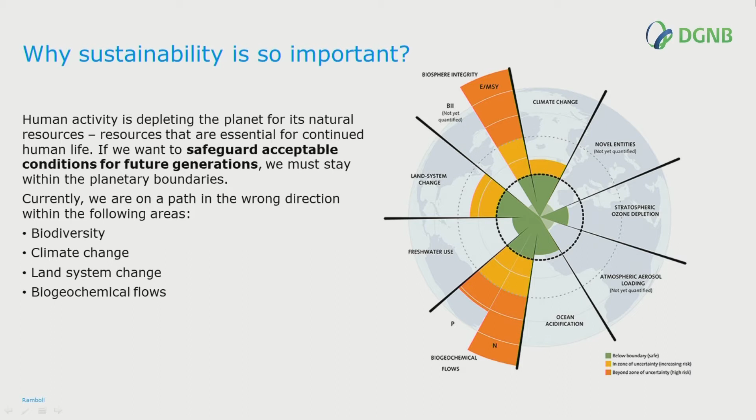So that is, first of all, within biodiversity. There's so much loss of biodiversity every year that it is dangerous for the planet. We don't have many years left if we don't do something.

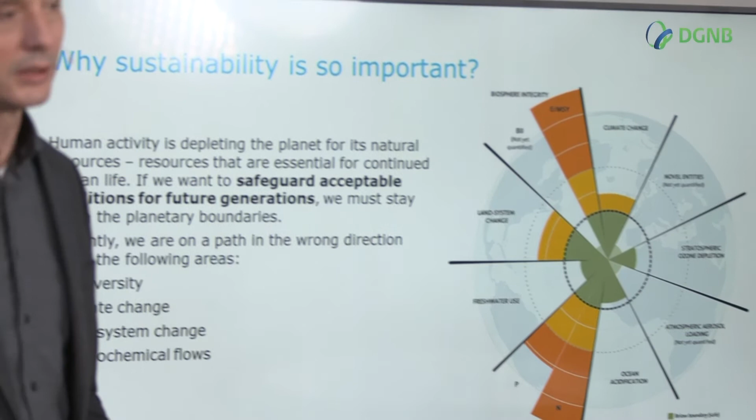It's also climate change, but a little less serious, surprisingly, because that tends to be all we talk about. And then it's about land system change, and finally about biogeochemical flows, where I think at least the last one is not so relevant for the building sector, but the three most critical ones are very relevant for the building sector.

So we really have to look at those planetary boundaries and get them back within the limits, within the green zone. Otherwise, we are going in the wrong direction.

You can also say this in a different way. You can say that unless we do something, then already in 2050 we will use the biocapacity of 3 Earths, and so you can imagine how fast it will go before we have used up all resources.

And when people try to understand what we mean by this, well, what we mean is if you have money in the bank, you spend all the money, then you start borrowing money, but you cannot continue borrowing money. At some point, you have to pay that money back. Otherwise, you go bankrupt. So humankind, you could say, is about to go bankrupt for the biocapacity of what we have borrowed from Earth. We have to pay it back.

And so that's what I'm going to talk about. How can we do that? I want to start with one quote that I think is quite interesting. In many ways, the environmental crisis is a design crisis. It's a consequence of how things are made, buildings are constructed, and landscapes are used. This is a quote from 2007, so it's already 15 years ago, from a book by Van der Ryn.

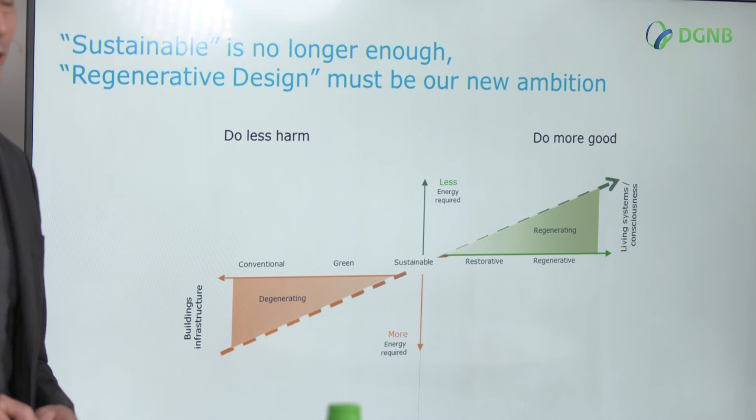But that's not where we are today, and it's not really where most ambitions are going. Most ambitions are going less than sustainable. So you could say, on one hand, the mindset, to the left, is how can we do less harm? How can we reduce carbon emissions? How can we reduce biodiversity harm? How can we conserve energy? So that's the mindset we have today in the building sector, the mindset of doing less harm.

If we want to do things that are good and bring back those impacts on the planetary boundaries, we have to do more good. So we have to move beyond sustainability, to restorative design and regenerative design. So if I put an arrow here, where are we today? It's going to be not very sustainable. Most building codes are at the far left end of this scale.

We have certification schemes like DGNB. They are trying to move the standards to the right. So DGNB Silver is doing some less harm than conventional buildings. DGNB Gold is doing even less, and Platinum is doing, you could imagine, almost sustainable. But they're still in that end of the scale where we are trying to do less harm, and we are not really reaching sustainability, true sustainability. And at least we are not crossing the line to do more good.

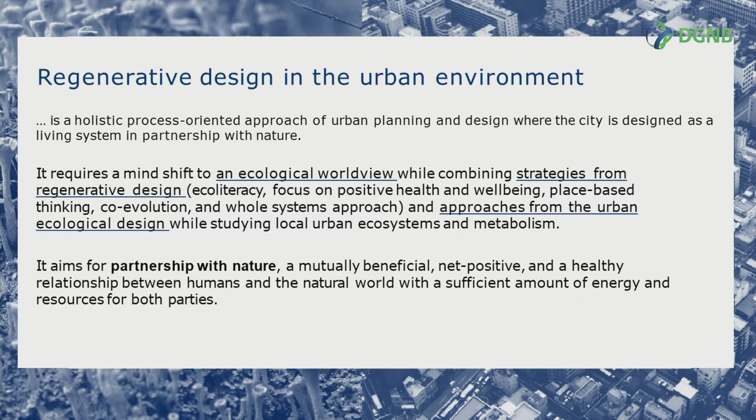But basically it aims for partnerships with nature. So I think here the message is we have to shift our mindset and we have to look at nature as a partner. And so there are a number of new things we have to learn about co-evolution, about place-based thinking, whole systems approach.

So you could also show that in a different way. We are on a curve, the sustainability curve. We have a lot of things that we are doing and trying to achieve. And then we are at the end of the curve, and we cannot get further because we are limited by the mindset we have put in place when we design our buildings. What we need is really to take those 6 topics that I showed on the former slide and relearn them. In the Western world specifically, we haven't learned that in school. We have learned a different mindset.

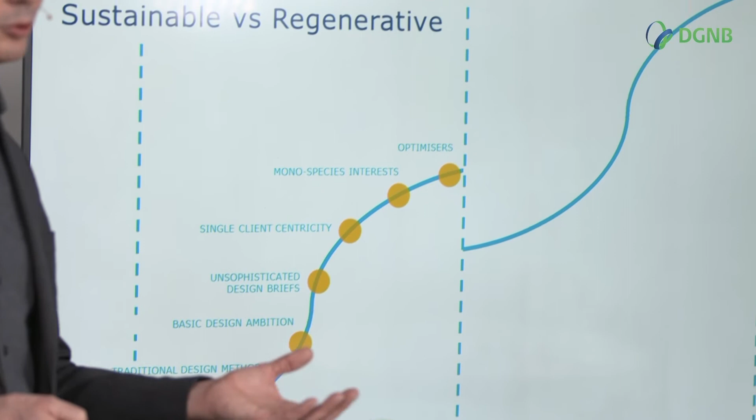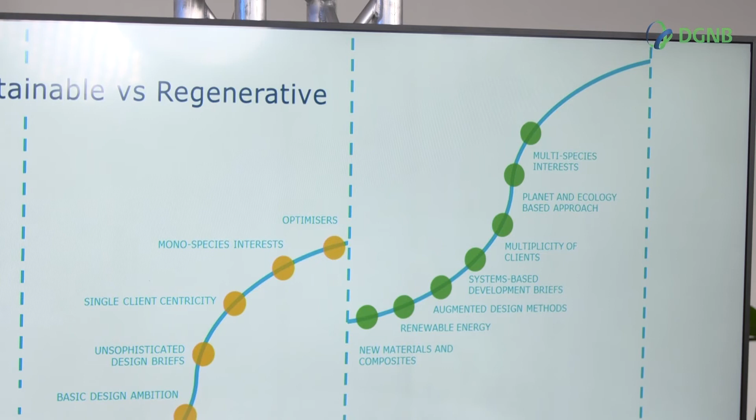But if you go to some of the other parts of the world, indigenous people, for example, they have a truly regenerative mindset. So there's another curve where we have to apply our new mindset, and then we have to use renewable energy and think in all these new ways to reach what we want to reach. So there is what I call here, at the bottom of the slide, old sustainability thinking and new sustainability thinking. We have to move to the new sustainability thinking, and we have to do that within the next decade.

So I think where we are today, best practice is DGNB Platinum. By the way, where I come from in Denmark, we also use DGNB, a Danish version of it. We have to move to a net zero mindset quite quickly in the next couple of years, and then a net positive mindset, and then a regenerative mindset by the end of the decade. If we can do that, then we can start paying back our debt to nature, and we can start creating hope that we can also survive in the future.

And I want to show you just a few attempts, but again, these are designs from the present, so they are not necessarily the future mindsets. Some of the features here are about regenerative design, but basically, if you have a site and you're designing a building, what you have to think of is how can I give back to the site more than was there in the beginning. And in this case, this is an office building in the center of Copenhagen.

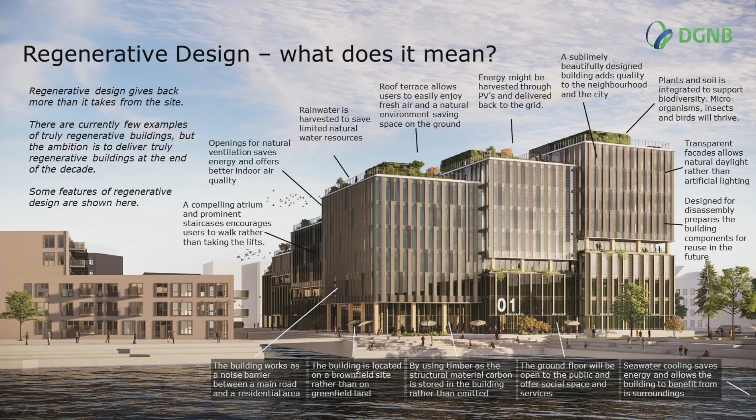It's a brownfield site, so there was something there before. It used to be an industrial site. And so first of all, it's, in this case, quite easy to give back more because there was nothing there. There wasn't even any green space or any biodiversity, any nature. So of course, it's going to be part of it to put back some elements of nature. In this case, the building is also trying to reach zero energy, zero carbon emissions.

It's a timber building. There is a noisy road on one hand, so it's thought of as a noise barrier between the road and the residential area on the other side. It will use the seawater because it's on the harbor front. It will use the seawater for cooling the building or as a heat sink for the heat pumps. It will create social space. So regenerative design is not only about nature; it's also about the social elements of giving back to the site.

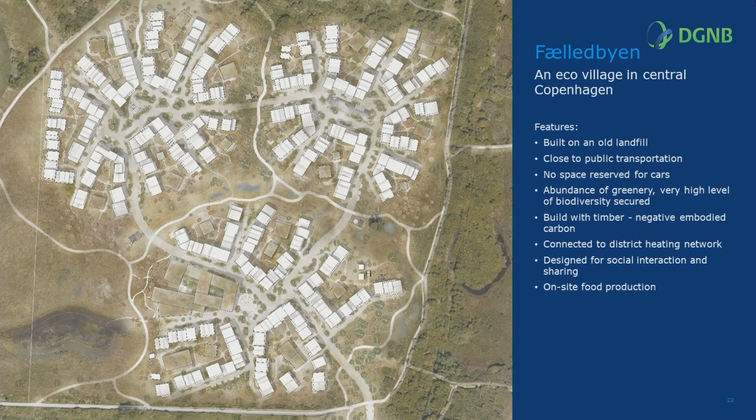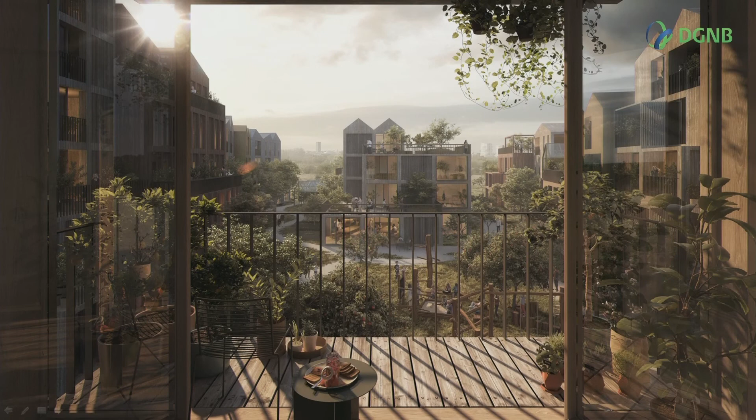And so we came up with this idea of very green, again, timber buildings, very human scale. Here are some pictures. A lot of greenery, very connected to nature, no cars, all public transportation. And all of the traditional sustainability criteria are fulfilled. But as you can see here, there's much more nature here than there was on the previous project, because there is space. And so you can have small lakes. You can imagine how insects, microorganisms, and even bigger animals can live here next to humans in the center of the city. Not exactly the center, but very close to the center. Is it regenerative? Good question.

And then finally, this is a project that everybody shows, yesterday and today, the Bosco Verticale in Milan. It's definitely green, and it definitely gives back more green space to the site than there was in the beginning. It has a lot of qualities, but there's also a downside. There is a lot of structural concrete, or embodied carbon, in this building because it carries so much weight. And of course, there's also the cost element. Is it feasible, how much does it cost to maintain it with all these trees? So again, you can ask, is this regenerative or is it not?

I don't want to answer that question, but I think if you are really interested in doing regenerative design, there is a very good tool that was also developed in Denmark, partly by some of my colleagues at the architecture school in Copenhagen. It's the material hierarchy or material pyramid, and it shows at the top the most carbon-intensive materials that you should use less of.

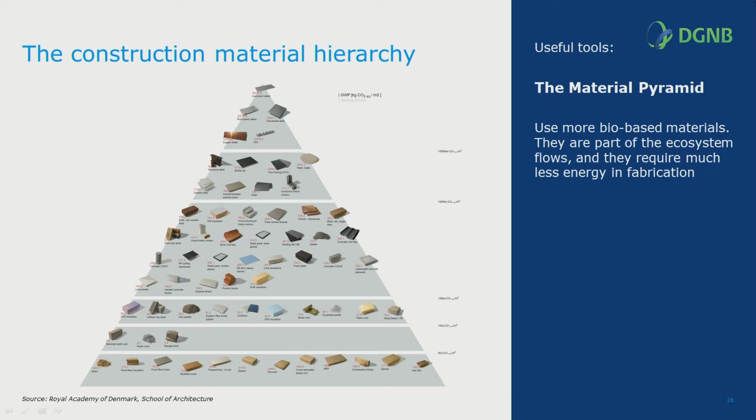At the bottom are all the bio-based materials that have a carbon capture component to them, and they are renewable. They can be produced over and over again, and so those materials should be the ones that you use the most of, and so on for everything in between. If there is an alternative, you should always go as low as possible in this hierarchy. That would be a very good guideline for achieving maximum regenerative thinking, and also less embodied carbon.

One more point I want to make before I finish is about the system boundaries. And again, we see cities can be very different. Some can be very dense with high-rise buildings. Others can be very flat, a lot of urban sprawl. And so at what scale, or where do you set the boundaries if you want to do a regenerative project? And a recent study by the CTBUH, Council on Tall Buildings and Urban Habitat,

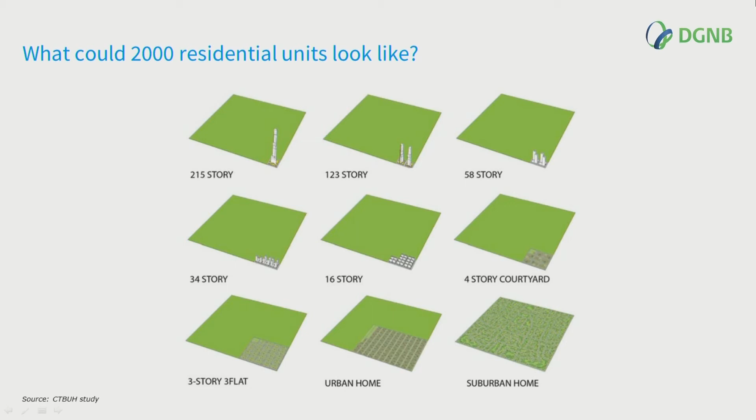showed 9 different ways to build 2,000 residential units. You can either go in the very low right-hand corner, you can go single-family houses in a big urban area, 1 square kilometer for 2,000 units typically. And then you can go all the way up and build 2,000 units in one high-rise building, which would be 215 stories high.

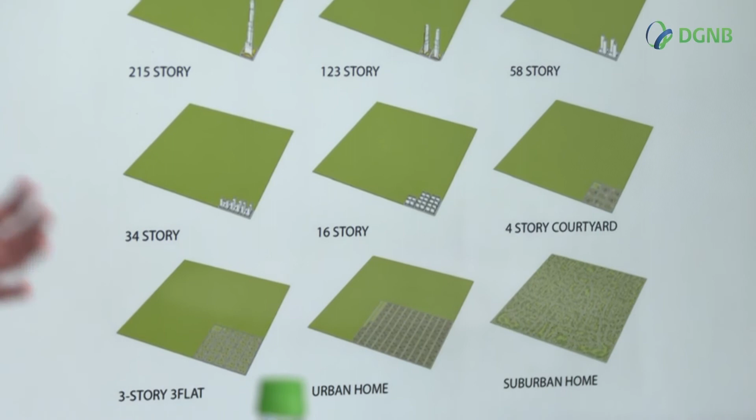And so in terms of land, how much land do you take up? The high-rise is preferred. But if you want to do a regenerative building, I think the single-family home is probably the easiest one to do in a regenerative way. But then you can see you will also take up a lot of land. Land is a carbon capture sink or carbon capture machine. So if you take up land, you prevent yourself from capturing carbon. You prevent yourself from planting a forest. And so that has also a negative impact.

And the other thing that you don't calculate, if you just compare high-rise to single-family homes, you'll probably find there's more embodied carbon in the high-rise building. But then you forgot to take into account all the roads connecting the houses, all the infrastructure, the utilities, piping, and you forgot to take into account all the transportation that it requires in the daily life of these people. So it's not just about high-rise versus low-rise. It's about the whole system thinking. So that's where regenerative thinking comes into mind.

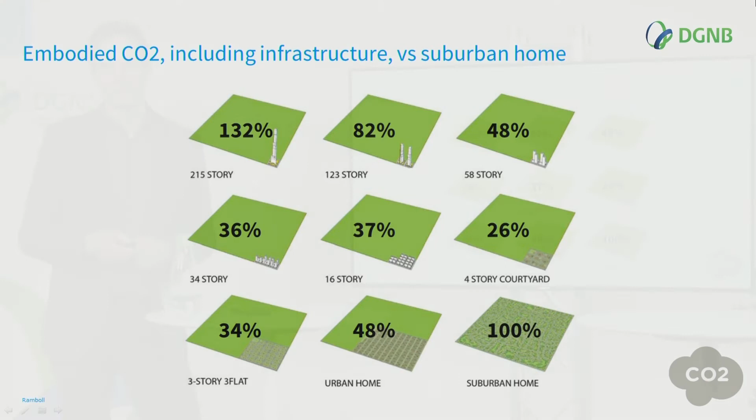And so from an embodied carbon perspective, what is most optimal? Well, if you say the single-family homes are 100% embodied carbon, the denser you build, you can see the less embodied carbon you generate until a certain point. Then once you build really, really tall, like the 200-story tall building, then you start getting more embodied carbon. But you can actually build also 120-story tall buildings and use less embodied carbon than for the single-family homes.

The optimal, in this case, is probably about 5, 6, it says 4 here, but 5, 6 stories. So it's very typical for European cities like Berlin, Munich, Copenhagen. That is actually a very good city model, so no need to change there.

And the other question that comes up is, of course, then what is the KPI, the key performance indicator? What is it we measure? Is it CO2 per square meter, or is it CO2 per person? Because if you have single-family homes, you might have more space per person than if you have tall buildings. So it's actually the personal footprint that you would be interested in. And is it the neighborhood, or is it the buildings you measure? So those questions we would have to answer.